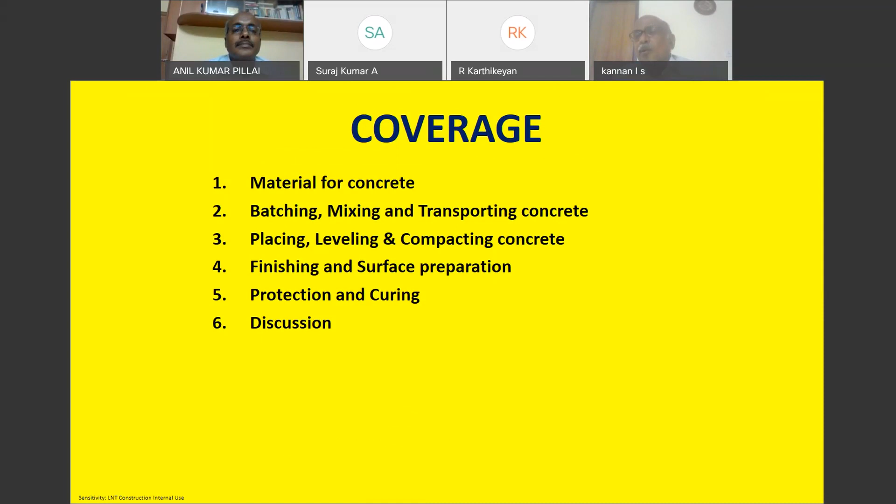So let me start the presentation. At the end, you can throw the questions through the chat, so that we can reply at the end. This is the flow I want to take: I'm not going to talk about materials here, or material properties - I'll be talking about handling of materials, batching, mixing, transportation, placing, leveling, compaction, finishing, protection and curing. Then we'll go for a discussion. I'll also talk about cracks when we discuss protection and curing. First of all, let me start this slide.

So there is no meaning for this word without you and I. Why do we need you and I to fulfill the word quality? Quality is nothing but teamwork. Without team, quality cannot be achieved.

The team means the owner, the specifiers that is consultants, the contractors, contracted engineers, supervisors, the ultimate workman. Everyone should know what they are supposed to deliver according to the project need. The owner has to specify what exactly he wants, which will be converted by the specifier consultants. The contractor has to adhere to the specification norms, what is given as per the contract. He has to fulfill the product requirement. Then only the required quality can be achieved.

Because when we talk about concrete, without quality, we cannot produce good quality concrete. Because whatever structures we talk about, the majority of the structures, the life of the structure all depends only on the concrete what we make. So unless the quality of concrete is good, the structure is not going to serve the purpose.

That is the reason even IS code, if you talk about clause 9.3, says as a guarantor of quality of concrete used in construction, the constructor is responsible for the quality. That means you can do the design mix by any method. They are not worried that you have to do only as per IS 10262. You do the mix design as per any method. If you don't have knowledge on design, refer to 10262 and do the design. But the quality parameters and durability parameters, what the concrete is supposed to fulfill as per the requirement of IS 456, the contractor or the executor has to execute. That is what is very clearly spelled out as per the code.

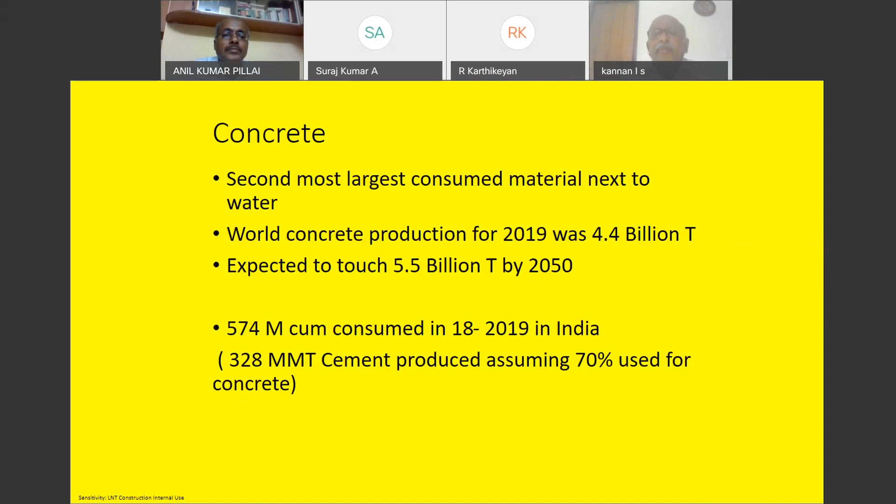And when you talk about mixes today, making a concrete mix is a real challenge. Earlier days, when you make concrete, the concrete was made only with a maximum grade of M40. I'm talking something around 20-25 years back. The highest grade concrete produced was 40 or 50, not more than that. And we had very little material available for making this concrete. Now today, we are flooded with a lot of materials like various types of rocks available, multiple types of sands available in making concrete. Alternative materials like fly ash, slag, silica fume, natural pozzolana, so many other materials are available. Chemical admixture industries have grown like anything.

So where we are able to make wonderful concretes with the help of chemical admixtures, the knowledge base on all these materials and subsets of materials is essential in making concrete today. Then only the producer of concrete or the concrete technologist, those involved in concrete making, can optimize and make concrete. For example, optimization means - in most cases whatever we are doing is design mix concrete. Even in any project site, if you take about 1 lakh cubic meter of concrete, even if there is a reduction of 1 kg of cement per cubic meter, you are able to save 1 lakh kg of cement through your optimum design mix.

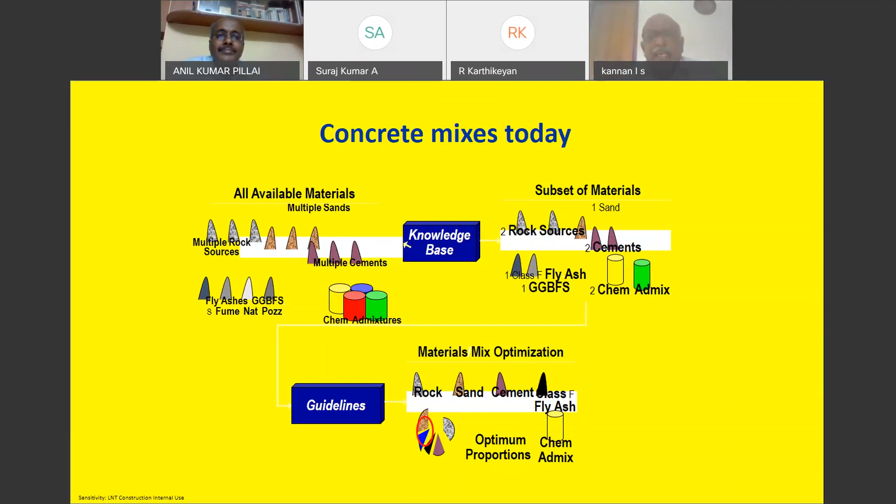As we all know, the materials for concrete are common: cement, mineral additives, fine aggregate, coarse aggregate, water, chemical admixtures, and others. Generally, when an owner or consultant visits the project, he says, 'you have done a beautiful concrete here,' or 'you have done a bad concrete.' What made them say that? It is not the quality of concrete, the water cement ratio, or the mix proportions. It is all about how the concrete is handled and placed at site that made them give these answers. They are able to comment only by seeing the surface finish of the concrete.

It all depends only on the workmanship, how the concrete is handled at site. Because production of concrete is only 15 to 20%. The remaining 80% is left to the hands of the field engineers. The concrete has to perform based on the execution parameters, which is what we are going to discuss more - how to handle and make concrete at site.

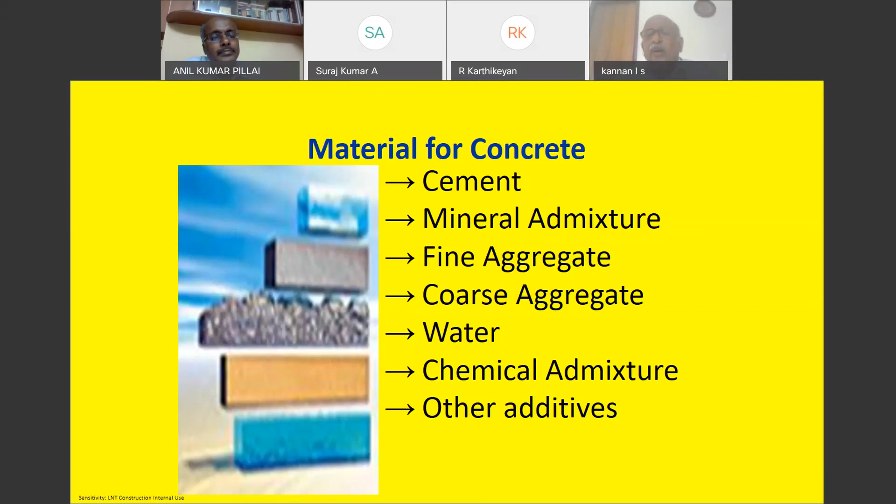Concrete can be made in 2 ways. One is at project sites, generally using a 10x7 mixer in small projects, or even for any residential building, we can go with a 10x7 mixer using nominal mixes - that is 1, 1.5, 3 or 1, 2, 4 and so on. The other thing is using a batching plant. The batching plant is categorized into 2 categories: one is a commercial plant where ready-mix concrete is made from a centralized place and supplied to project sites. The other is an on-site or off-site batching plant, made only for that particular project - for the project need, you can install a batching plant inside the project site, and the concrete can be produced and made there.

IS 456 stipulates M20 as the minimum grade of concrete for structural concrete. Even today, in some cases I come across, people say they have used M15 grade concrete for structure - we are not supposed to use that. After the revision of the code in 2000, IS made it very clear M20 is the minimum structural grade. In areas like coastal Chennai, depending on proximity to the seashore, the grade of concrete should be minimum M30 when closer to the sea, and when we go deeper inland it can be M25. So depending upon the exposure condition stipulated in the code, the concrete needs to be designed. It is not that only M20 or M10 is sufficient for my loading - depending on durability considerations, these are all parameters stipulated in the code that need to be followed.

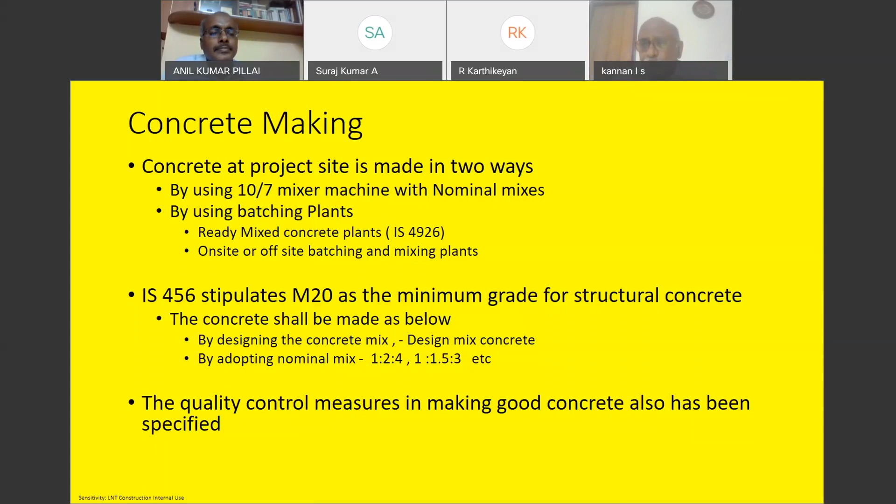When it comes to site mixer concrete, the concrete with a site mixer shall be made using design mix concrete converted into volume batching. You need not go for 1:3 or 1:4. So how do you do that? You do the design mix, and the design mix can be converted into volumetric batching as per the codal provisions.

IS also specifies, as per clause 10.2.4, volume batching may be allowed only when weigh batching is not practical, and accurate bulk densities of the materials actually used in the concrete have been established. That means when you are able to establish the bulk density of material, you can very well convert that volume into weight, and you can do it straight away.

What you can do is the design mix by weight. For instance, an example: if the density of coarse aggregate is 1500 kg per cubic meter, let me assume that. Suppose if you are using 300 kg of cement, that is 6 bags, and your 20 mm aggregate is 600 kg, as per the design mix, that means per bag will be 100 kg of aggregate.

So 100 kg of aggregate cannot be handled by 2 people, so you divide it into 50 kg in terms of boxes. Instead of making 1.25 CFT boxes, you make volumetric boxes equivalent to the volume of 50 kg of aggregate. So 50 kg divided by 1500 comes to 0.033 cubic meter.

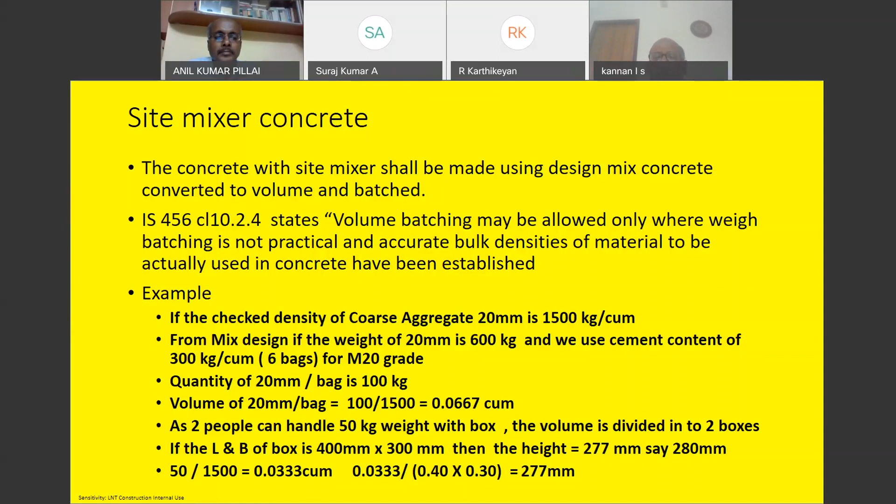So 0.033 cubic meter, and the box size can have length and breadth of 400 by 300, so the height should be 277. If you make a box like this for 50 kg, 300 by 400, the height is 277, and if you fill the aggregate up to the top, there should not be any overflowing. It should be made level — exactly this is going to weigh 50 kg of material.

In case of sand, check the bulkage and correct the volume for bulkage, and the height can be suitably adjusted. So instead of 277, maybe it may be 300 or 310, depending upon the density and bulkage volume. You reduce water accordingly, so that your design mix concrete, as it is, you can make in your 10/7 mixers. If it is as it is, well and good — you can produce a good quality concrete, and the structures will be more durable.

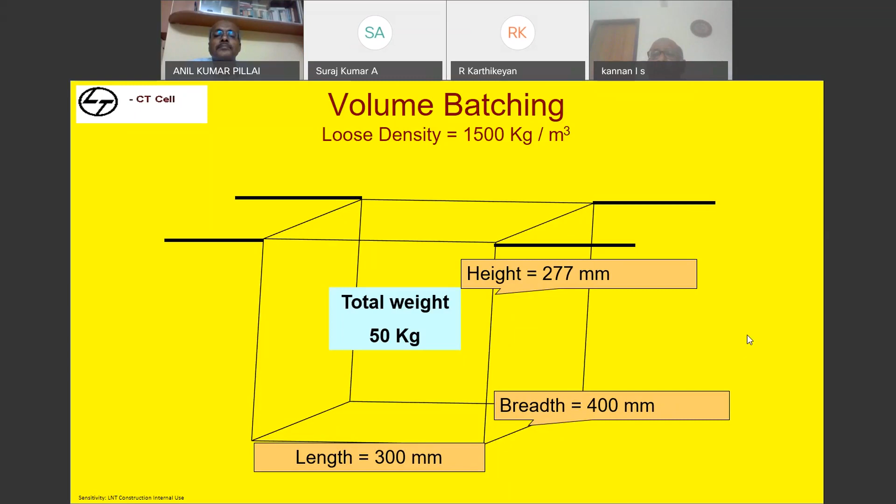When it comes to batching plant, as per IS 456, all concrete operations at project sites need to be done by batching and mixing plants only. In batching, cement and aggregate need to be weighed by mass. Admixture, if solid, by mass; if liquid, either by mass or volume. Water, either you can weigh by mass or by volume in calibrated tanks. This is what has been very clearly spelled out.

And what they say is the gradation of aggregate should be controlled by obtaining aggregates of different sizes and blending them in the right proportion when required. That means you don't go for a graded material, because when you go for a graded material, the gradation may not always be the same when you go with a design mix.

Whenever you are going for a design mix, what the code insists is you go with single size material of 20mm separate and 10mm separate, do gradation analysis, then blend 20mm and 10mm together depending upon the grain sizes available, to make it graded aggregate and use it for concrete making, so that your mix design and the quality of concrete can be controlled.

Only thing is, when you are making it, the separate material needs to be stocked in separate stockpiles, so that intermixing should not happen.

The gradation of coarse aggregate and fine aggregate should be checked as frequently as possible, so that the same material used in the mix design is used, or the material property is not varying much, so that the property of concrete is intact as per the design. The measurement of aggregate and material should be done in calibrated measures within the tolerances specified as per the codal provision.

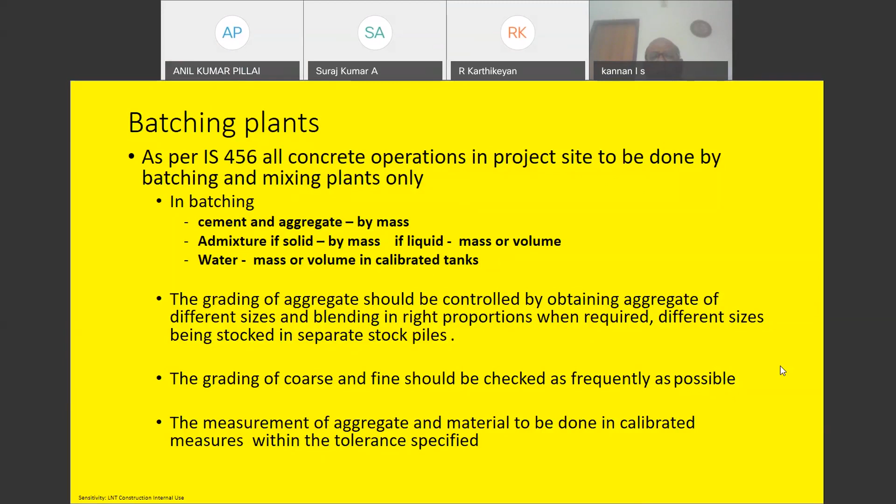There is a code called IS 4925. This is a code for batching and mixing plant. Even though IS 4926 or IS 456 is generally followed for calibration of tolerances, this is the code that needs to be followed for batching plant calibration, where recently the code has been modified and revised.

What they say is cement and other cementitious material, the tolerance is only plus minus 1%. Earlier this was 2%. Sand and aggregate plus minus 2%, earlier this was 3%. Water it is 1%. Admixture it is 3%. So the weighing machines used for weighment of aggregates in the batching plant need to have this tolerance.

One more thing they say is every batch of material being measured, whether it is a CP30 plant or any other, every batch that is measured - suppose if you are making only 0.5 cubic meter production in the CP30 plant, even for 0.5 cubic meter, the error should be within this tolerance.

Suppose you are going for cumulative batching of 6 cubic meter in a plant on a continuous batching system, they have given two options. When you are going for continuous production, the error can be taken on a continual basis. For 6 cubic meter transit mixer production, the overall batch sheet should satisfy within the error tolerances specified. The calibration of the batching plant needs to be done as below.

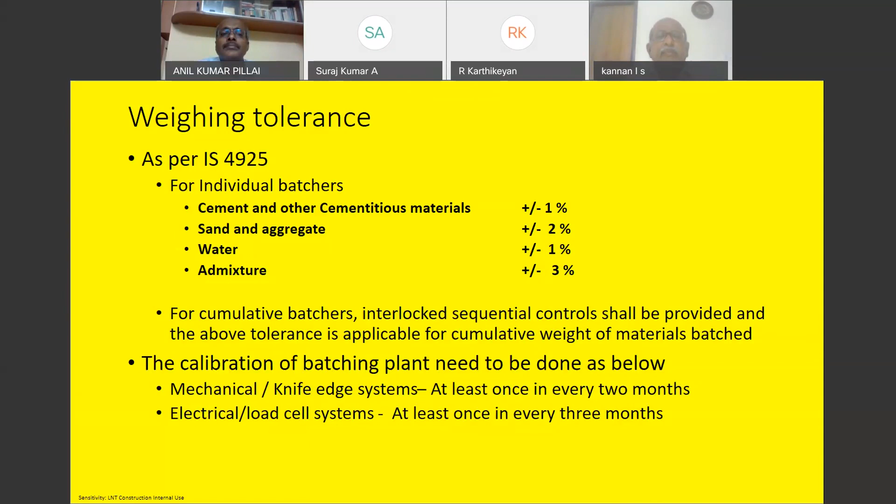There are 3 types of batching equipment available: rotary mixers, pan mixers, and twin shaft mixers. Earlier, larger rotary mixers were available and were being used, but now these rotary mixers are not used. Now mostly twin shaft mixers and pan mixers are used for concrete production.

Normally, the twin shaft mixer is used for producing concrete even with lower slump or higher slump. Generally, it is used for making PQC, pavement quality concrete, with 30 to 40 mm slump, which can be produced very effectively with twin shaft mixers.

When you go with pan mixers, which are the most commonly used batching plants across the industry, plant capacity is available between 30 cubic meter to 120 cubic meter per hour. The main thing is the efficiency of the concrete produced from a pan mixer batching plant depends only on the angle at which all these arms have been fixed.

This is because all these arms are controlled only by springs, and the gap between the mixing arm and the wear plate should be only 6 millimeters.

If the gap is more, automatically you will find a lot of accumulation of material at the bottom. When we receive concrete at site from the transit mixer and start delivering it, we find a lot of aggregates rolling out initially. This is because the gap in the batching plant is more, so only dry material gets fed to the truck, and unmixed aggregates roll out in the initial phase.

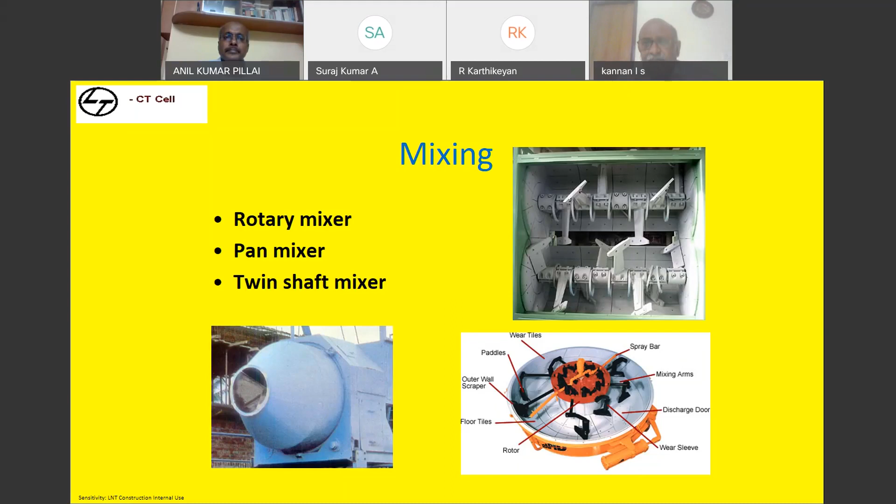When it comes to batching plants, these are all various types of plants. Nowadays, we are using a screw conveyor for delivering material to the plant, to the stocking bin. The same conveyor is used for adding 20 mm, 10 mm, crusher sand and so on. If the conveyor belt is not fully empty when you change and add material, unwanted material ends up going into the other bin.

This happened at one project site, maybe 10 to 12 years back, around the time conveyor belts were first introduced. Two batching plants went under operation. One batching plant was producing beautiful concrete of 150 mm slump. The other batching plant gave only 30 to 40 mm slump.

We started the concrete and went to site, asking why it hadn't come out right. They said, sir, I'm not getting slump. When I went up, I found sand had got mixed with the 10 mm aggregate. By mistake, sand had been dumped in the 10 mm bin from the last end belt. The sand content became more, which took away the water, so the concrete became stiff. So we emptied it, reloaded, and started again.

These are all practical issues that normally happen in the batching plant, but they need to be taken care of. Unless we have a thorough inspection mechanism with checkpoints, it's very difficult. Nowadays, we have made it so that unless the belt is fully empty, you cannot move it to the other system. We have made a digital system so the belt will be 100% empty before it can move to the next bin. You have to improvise your system to avoid these quality deficiencies.

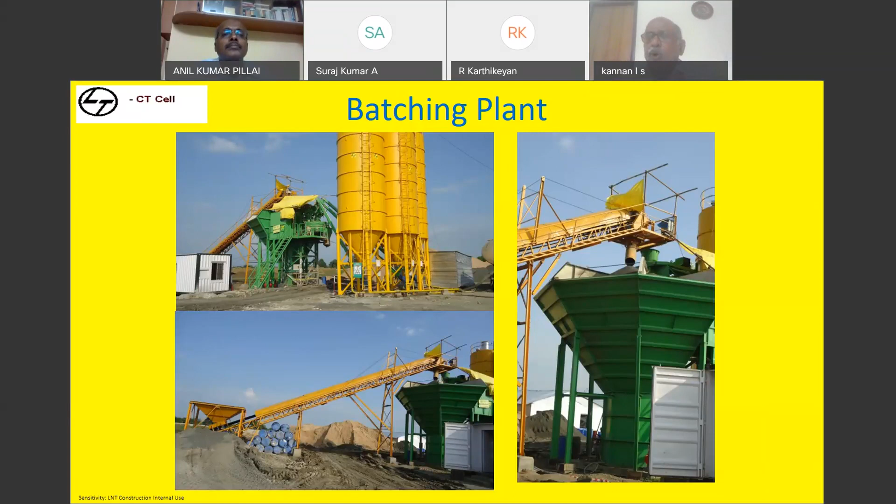The precaution we really need to take is to store all aggregates separately in separate stockpiles, preferably under shade. Why? In today's scenario, many concrete requirements come with temperature controlled concrete. If the aggregate is stored in an open area, it absorbs a lot of heat, so controlling temperature becomes very, very difficult. So always make it a practice to put a shed and store the aggregate.

When using a wheel loader, especially a front end loader, for feeding aggregate, ensure mud is not mixed in, because normally the wheel loader operator may not get friction, so what he tries to do is push. Suppose the aggregate stockpile is there at 1 meter, even before that he will start pushing everything, and he will pick up the mud also.

So ensure some amount of material is left, maybe around 1 or 2 feet, and the wheel loader is operated so that the right material is used and unwanted mud does not go into the system. Because mud is a foreign material, when it goes inside, your workability will drop. It's very difficult to control in a continuous operating system. If something goes wrong, it's very difficult to identify and correct, because time is lost, and the other thing is cost-wise it has a huge impact, so we need to take care of this.

When using conveyors for feeding, ensure they are fully emptied before loading, and identify cement silos and fly ash silos with color coding. Today we are using different cements and different mineral additives. Some project sites handle sulfate resistant cement and OPC, some handle OPC and PPC cement, and some handle OPC, PPC, fly ash and slag separately, depending upon usage.

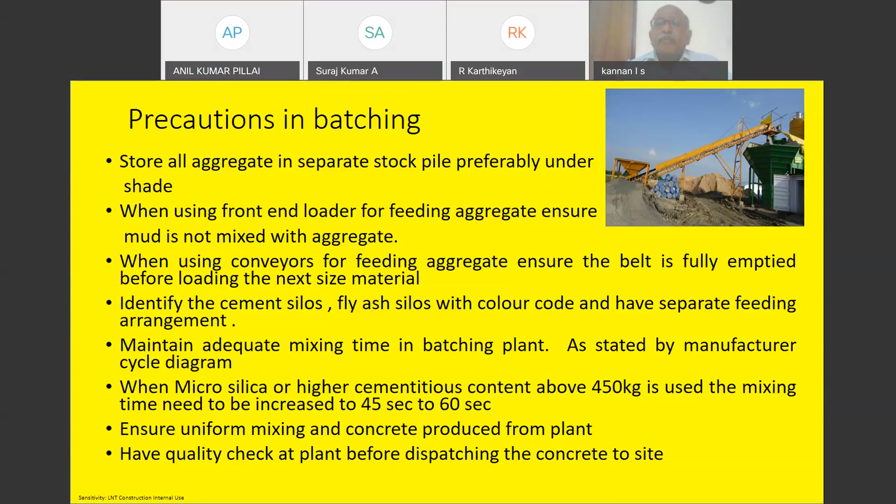Now, possible sources of contamination at the batching plant: allowing adjacent stockpiles. If you are dumping aggregate side by side - 20mm, 10mm, or sand - and there is no bifurcation available, there is a possibility of overlapping which can contaminate the aggregate. When this contaminated aggregate is fed again, your mix design parameters will change and your concrete quality will change. As I already discussed, scooping underlying layers of soil using the front-end loader is another issue.

Dumping the wrong size aggregate in a bin - 20mm material may look slightly undersized, but you should not dump it into a 12mm or 10mm aggregate bin. If you are getting a perfectly sized 20mm aggregate, it may mislead. Similarly, 10mm aggregate should not go into a 20mm bin. This usually happens only at night time, so we need to be very, very careful when dumping material at night.

Then there's aggregate leakage through and around bulkheads in storage bins. Wherever a storage bin is present, there should not be any mixing of aggregates - there should not be any hole, gap, or anything that allows mixing. One aggregate bin may be full while the other is half full, but aggregate should not flow from one bin to the other. That also you must ensure.

Leaves or other contaminants falling onto the aggregate stockpile - especially sand - is another issue, since people tend to stack material near trees, and leaves fall on it. This causes organic impurities and vegetation to start growing; you can find a lot of grass growing. That's a clear indication that organic impurity, plus silt and clay, is present, because sand alone, being a cohesionless material, cannot support growth - some cohesive media must be present for vegetation to grow. So as a user of the material, if you find such contamination, you must remove the vegetation and the contaminated material, and it should not be used for concrete unless it is washed and processed.

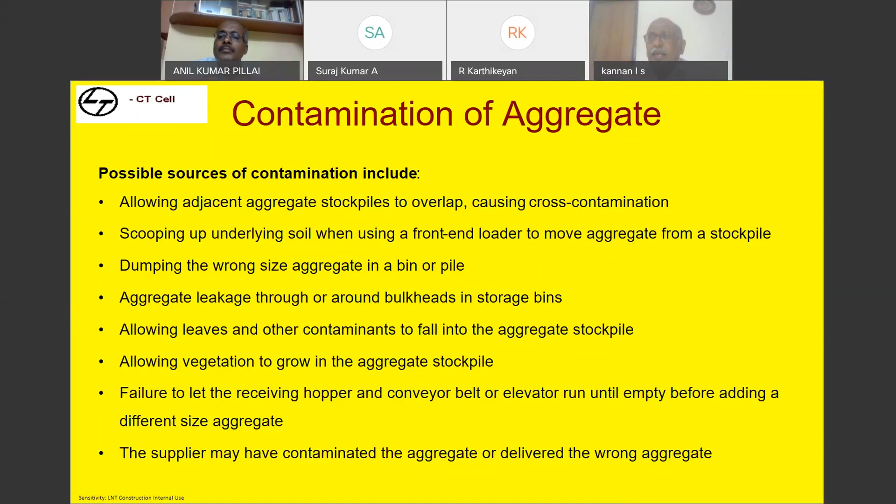What is the material that is reached site? Please check the material is in order. The quality of the material is in order. Then only allow to unload, so that by this you can maintain the quality.

Then we are coming to transportation of concrete. Transportation can be divided into two major categories: one is horizontal movement, the other is vertical movement.

Wheelbarrows can be used for transporting smaller concrete, especially in small project sites where you are working with the mixer machine. You use wheelbarrow instead of transporting concrete manually. Put a plank, run the wheelbarrow, and you can do it. So 2.5 cubic meter in a 70-meter lead you can do per hour.

Small tippers, dumpers like your front-end loaders, small loaders can be used for transporting concrete in small project sites. It can handle up to 100 mm concrete.

Tipper trucks can be suitable for stiff mixes, especially PQC and where we are transporting it. But ensure there should not be any contamination to the material, because normally whenever the trucks are free, the store will take them for purchasing some other material like diesel or something. So contamination should not happen, spillover or something should not happen, so that the concrete should not get contaminated. Ensure when you are engaging the tipper for concrete, it is fully clean without any

contaminated material. Vertical movement, you can use skips and buckets or crane, even tower crane can be used for concrete. Even the buckets which are used for transporting concrete can be fabricated for 0.5 cubic meter or 1 cubic meter capacity.

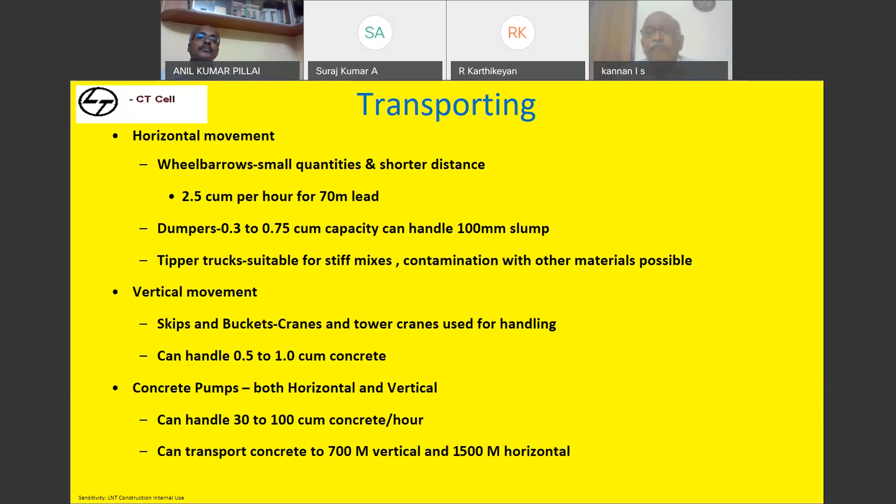We have done it. So these are all the transit trucks. Ensure whenever you are using a transit truck, always have the extended chute and dump the concrete, so that you are able to take it as close as possible. Especially whenever you are doing manual concrete, use this extended chute and dump the concrete. Don't dump it from the first chute, so that the concrete doesn't tend to segregate.

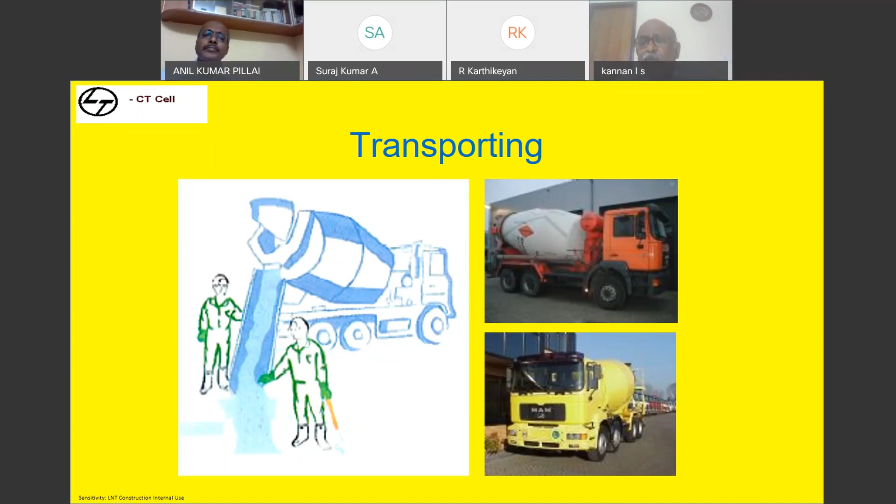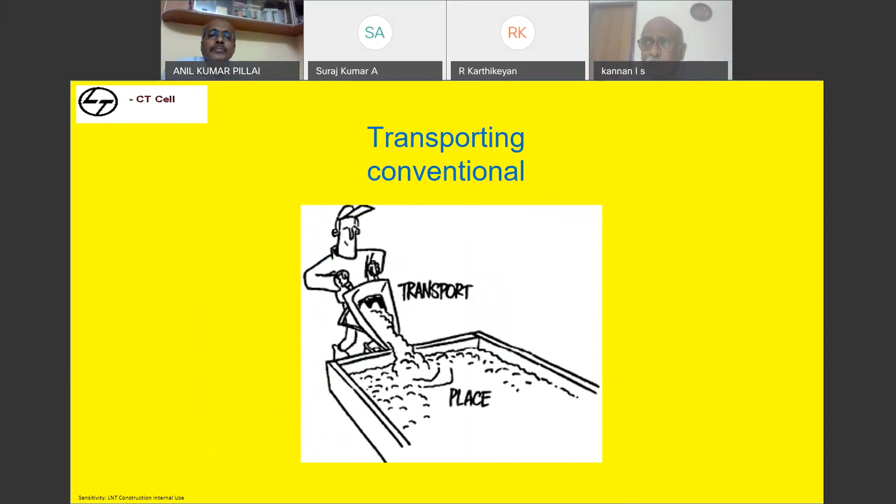These transit trucks have a capacity ranging from 3 cubic meter even to 12 cubic meter. We don't have 12 cubic meter plants in India. Some project sites are running with a 9 cubic meter plant, but the most commonly used is only 7 cubic meter, in which 6 cubic meter concrete is normally delivered. The conventional best thing is to use a wheelbarrow, where you get better productivity as well as you can minimize the variations in concrete.

So during transportation, slump loss during transportation need to be taken into account. Depending upon the distance to which you are transporting concrete, the concrete mix also needs to be designed. In hot weather, the mix can stiffen very fast, and you have to protect the concrete from hardening. Then in heavy rain, the mix becomes too wet.

Suppose if you are transporting it, even you have to close the top mouth of the transit trucks. Nowadays, even the trucks coming are coming with some lids to close. If old trucks are there, make an arrangement to close it. As far as possible, try to avoid batching concrete in heavy rains.

Mortar or slurry leak leads to workability loss. Normally what happens is if slurry is lost, the concrete becomes slightly segregated. You may not get the real workability or slump needed for the site. On a long haul, the mix can stiffen faster, especially in hot weather or for a long distance. So considering the distance to which the concrete needs to be transferred, you have to design the mix.

Contamination by oil, mud, and dirt should be avoided. Segregation can arise due to incorrect chute length or a long haul, placing on a platform, remixing, and reuse.

This is what needs to be done, especially when transporting concrete. Even project sites use a chute for transporting concrete to place in a foundation. A chute inclination should be 60 degrees to avoid segregation. Generally people keep it around 10 to 20 degrees while dumping from the transit mixer, so the concrete will not flow, and somebody ends up adding water to push the concrete.

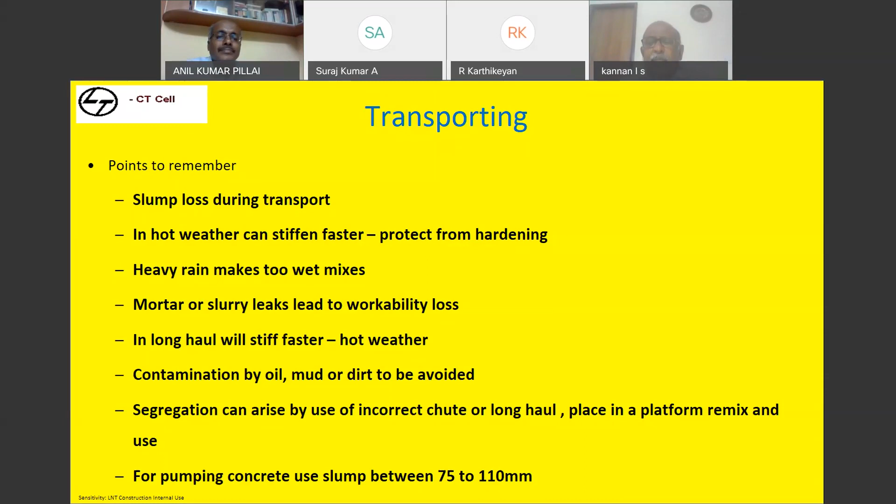You should not retamper the material. Have a proper chute with a proper slope so that the mixed concrete you receive from the truck, from the batching plant, goes inside the foundation without undergoing any corrections. For pumping concrete, normally 75 to 110 millimeters slump is essential.

Then it comes to site activity, which is placing. Placing concrete as close as possible to its final position, as quickly and efficiently as you can, to avoid segregation so it can be compacted. This is the objective. As per the code, the concrete shall be deposited as nearly as practicable in its final position to avoid rehandling. The concrete shall be placed and compacted before the initial setting time commences and should not be subsequently disturbed.

That means, suppose I'm making concrete and the initial setting time is 4 hours. I can handle the concrete up to 4 hours, provided the concrete mix design has the required slump needed to handle and place it within that time. It is not that I can retamper the concrete, add water, and extend it to 4 hours — my initial setting time is 4 hours, not that. If the workability is achieved, the code says to this extent we can make it.

Many of these specifications correlate with the ambient temperature. If the ambient temperature is 20 degrees or less, concrete can be placed up to 90 minutes. If it's more, within 45 or even 30 minutes the concrete needs to be placed, which is a highly impractical condition. The reason is, even when concrete is mixed at a batching plant and delivered to site, that itself takes around half an hour to 40 minutes.

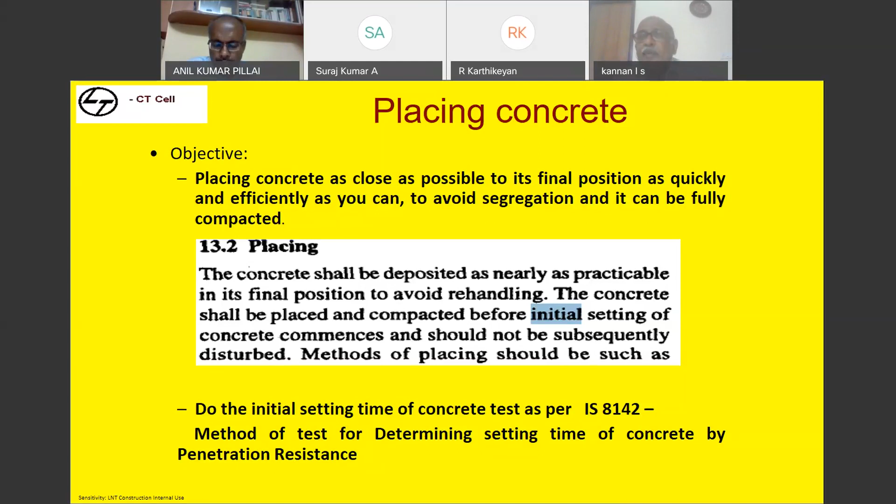Generally when I ask people, they say you need to place within the setting time of cement. But setting time of cement and setting time of concrete are totally different - let us not get confused between both.

The objective of placing is to place concrete as close as possible to its final position, as quickly as you can. Deposit concrete as near as possible, and place it in uniform layers, especially in columns and walls, at 450 mm.

Why we said 450 mm is because nowadays we are going with heights of 3.6, even 4 or 4.2 meters, soffit to soffit of slab, with single lift columns. And majority of columns are pumped. When pumping the column, within 4 or 5 strokes the entire column gets filled up. When you de-shutter, you find some waviness at the bottom - that waviness is nothing but segregation that has happened to the concrete as it is pumped, passing through the reinforcement.

Because today, considering seismic design and the congestion of steel reinforcement, placing concrete especially in columns is very, very difficult.

What we need to do is mark either 450 or 500 millimeters first in the column. Place only that much concrete needed and compact it well first, then pump further - you are placing concrete over concrete, so no segregation happens and you'll be able to vibrate it well. Make it a practice: only 450 mm is poured and compacted well, because that bottom zone is the shear zone, which needs excellent compaction. Let us not make the section weaker - don't pour more than 450 mm in the initial phase. After that, if you fill and vibrate, nothing happens, because you eliminate the segregation at the bottom.

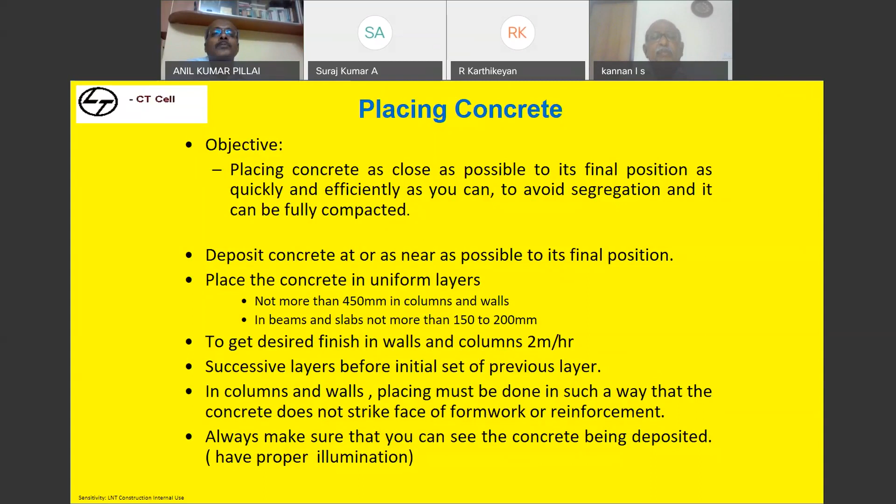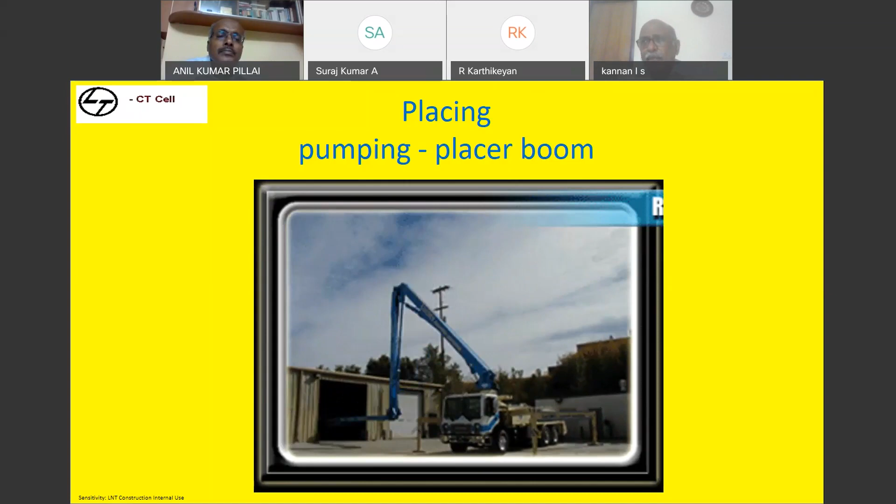This is the static pump. Everyone knows this is a boom placer. Boom placers are available in 36 meters, even 52 meter boom placers are available, but in India the 52 meter is not there. The purpose of the boom placer is that it can travel anywhere, even to the sides of structures, and be placed. Whereas a static pump needs a fixed line, in the case of a boom placer that is not needed.

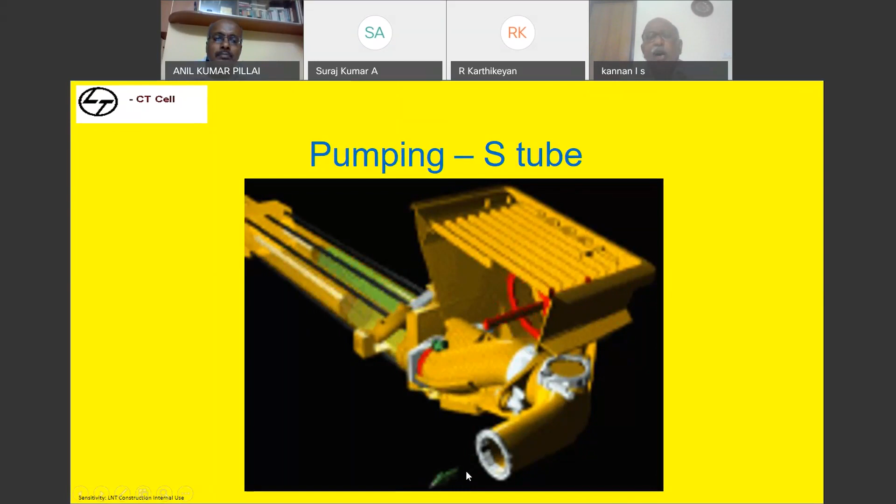When concrete is poured, the pump works with two pistons in a reciprocating action - when one piston sucks, the other pushes out. In a static pump, it goes horizontally out; in a boom placer, it goes vertically up. That's all, the system is the same.

Then from here, it falls in free fall, normally around 15 to 18 meters length. So what you have to do is try to bring the hose as low as possible, and bend the hose at the bottom. The hose can be bent to 90 degrees, or you can use a bend that can be reversed. When you reverse the bend, the free fall concrete will get accumulated there, and when pumping, a uniform concrete will get pumped out.

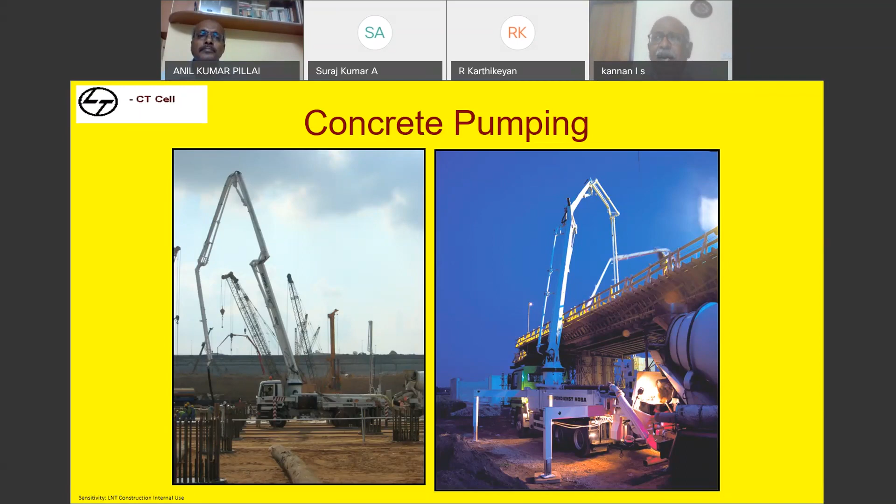So now this is a straight 90 bend. If you reverse that straight 90 bend, you can get good quality concrete, so that the concrete falls only with the 6 meter length pipeline and nothing happens. You get a full hose length of concrete, because normally the full pipeline concrete doesn't come through—generally it falls like half water flow, that's how concrete flows with the boom placer. When you do that reversal, you get good concrete, like how concrete comes with a static pump, and segregation can also be avoided.

When we talk about free fall height, federal highways permit 46 meter free fall, that is 150 feet free fall. They say the concrete mix we design should be such that when it falls from that height, it should not show any segregation, or the properties of the concrete should not differ. When it comes to Indian standard, it says it may be restricted to 1.5 meters.

Even though a lot of changes have happened in the code, many concrete and design parameters have changed, this parameter of restricting to 1.5 meter has not changed in the code. What has happened is, even if you're talking about 1.5 meter, completing the project site within that limit is very difficult—we don't have sufficient time to complete the job.

Secondary thing is, if it's restricted, people will say you should insert a trimming pipe. But with the way reinforcement design is happening considering seismic requirements, it's very difficult to insert anything inside. In some project sites, we've even observed that without formwork, if we stand on opposite sides, we are not able to see each other—to that extent, the density of reinforcement is there.

So in such cases, suppose you are going with a high lift column and the reinforcement is dense, don't go with normal slumpable concrete of 100mm or 120mm. Go with self-compacting concrete or high flow concrete, where you can design a mix like piling concrete of around 200 or 220mm slump, where your flow will be around 400 to 450 millimeters.

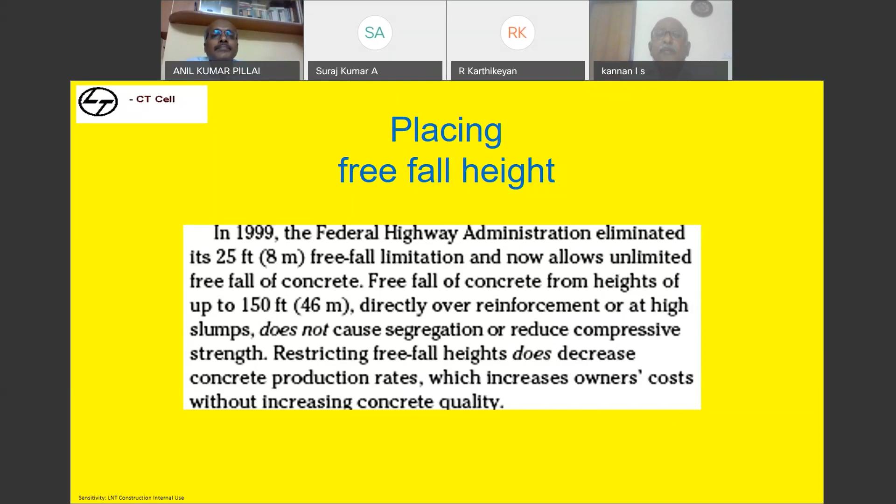When the concrete is placed by pump, the mix designed should satisfy the requirement of the pump manufacturer's specification. Normal slump of 75 to 110 millimeter is ideal. Cement content or cementitious content should not be less than 280 kg per cubic meter—that is the minimum mandate for smooth pumping.

People can say, I can pump a PCC even with 220. You can pump it, but many times the pumping will get choked. If you have a cementitious content of around 280 with sufficient sand content, the pumping may become easier.

Combined aggregate grading needs to be used, with slightly increased sand content, maybe 40 to 45% of total aggregate if needed. Depending upon the fineness modulus, you need to decide and add accordingly.

If you are able to make a concrete of such kind, your mix will be perfect. So to achieve that, if you have around 40 to 45% of sand in your mix, definitely your concrete will be highly workable. Then material finer than 300 microns in sand should be at least 15%, and including cement and sand passing, the overall weight should be 450 kg per cubic meter for a 20 mm aggregate.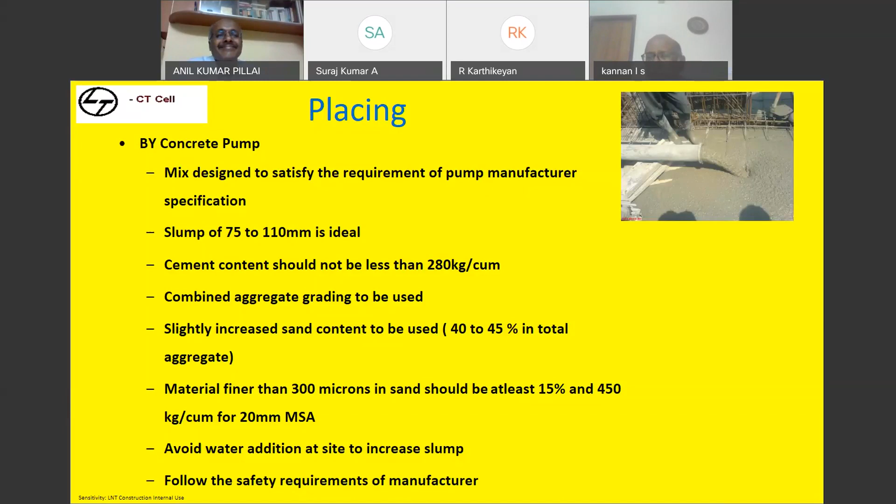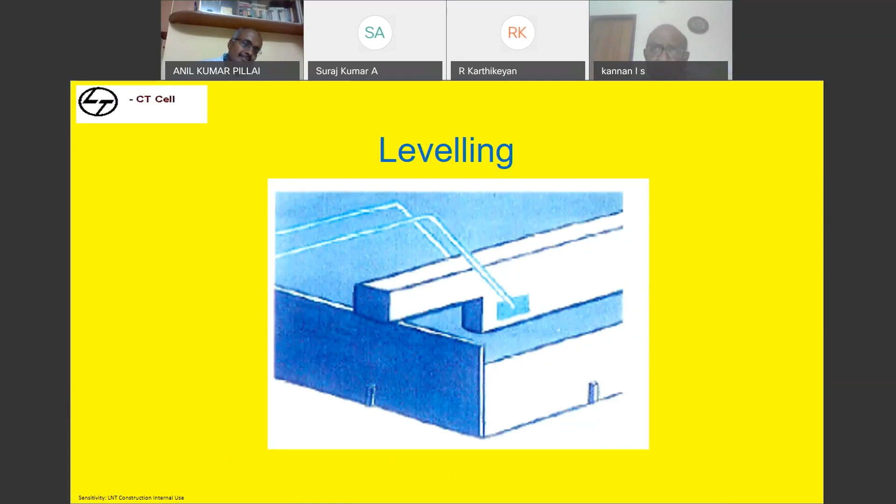The next thing is leveling. Why do we need to level concrete? We need to stop the structures at various levels, at various floor levels and all. That is one. Suppose if you're doing flooring, you have to stop at a certain level. There are various methods available for leveling of concrete. There is no hard and fast rule on what we have to do. Depending upon the project size, things can happen differently.

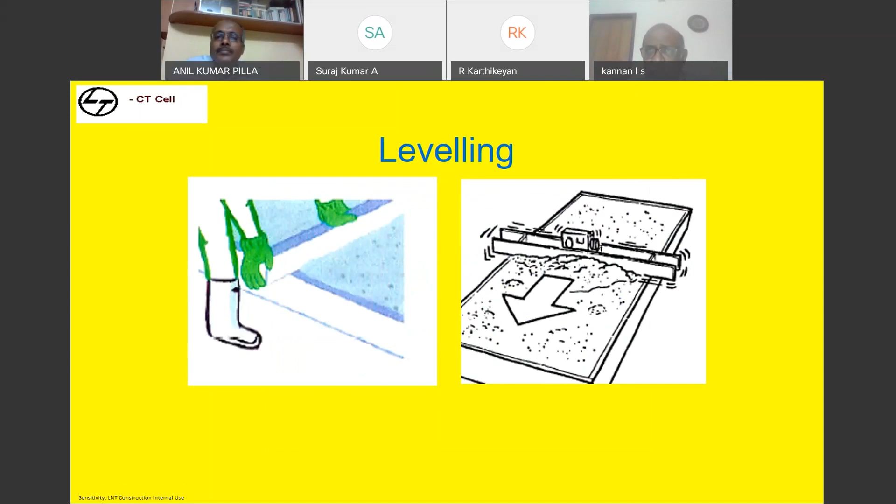Generally, people will be using a straight edge for making a normal level. Or they'll be giving a wooden peg. Suppose if you're doing a slab, they'll have a wooden peg, and they will keep on continuously measuring whether the thickness is okay. Normally survey lines will be given, and from survey lines, the level will be checked. Like that, all you can make it.

Nowadays, laser screed is also available, where undulations in concrete can be minimized. That is possible where your slump of concrete needs to be around 140 to 150 millimeter, where you need to place something around 40 cubic meter per hour. That's the requirement of concrete needed for the leveler and screeder. Only then will it be very effective to place and compact the concrete well.

So here, through the laser, you can give a level where the machine can do a compaction of 2 to 3 millimeter variations within the allowable tolerance. Normally the level difference we are observing is maybe in meters length, and the difference may be 3 millimeter.

So that can happen. In other project sites, you can even use a bull float for making concrete finish, because normally in Indian conditions we are not using bull float at all. Bull float can be used for making the concrete finish so that the finish happens in an excellent way, and leveling can happen. A straight edge also can be used for making leveling - it's not that you should not use it.

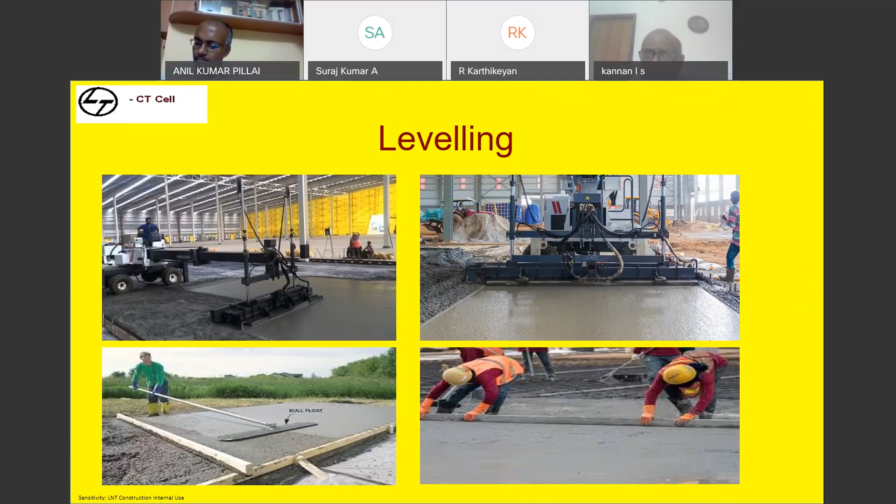So depending upon the volume, we can decide what type of equipment is needed. Only for larger scale work, or for industrial flooring and all, if you are thinking of that, then laser screed is the best, where we can do the job with more stringent quality norms and be able to deliver.

When it comes to compaction, why do we need to compact concrete? Compaction of concrete is more essential to remove the air entrapped in concrete. And is there any correlation to slump? Yes - higher the slump of concrete, you have to compact it less; lower the slump of concrete, you have to compact it more. The reason is when you are compacting it, the concrete is going to move. So if it's fluid concrete, you should not compact more, it will segregate. Lesser slump concrete, if you are not compacting well, it may not flow. So depending upon the slump, the compaction time also needs to be verified.

What will happen in case I am not compacting well, and how much reduction in strength? Definitely voids are going to be there inside concrete if compaction is not going to happen, and 1% void in concrete is going to reduce strength by 5%.

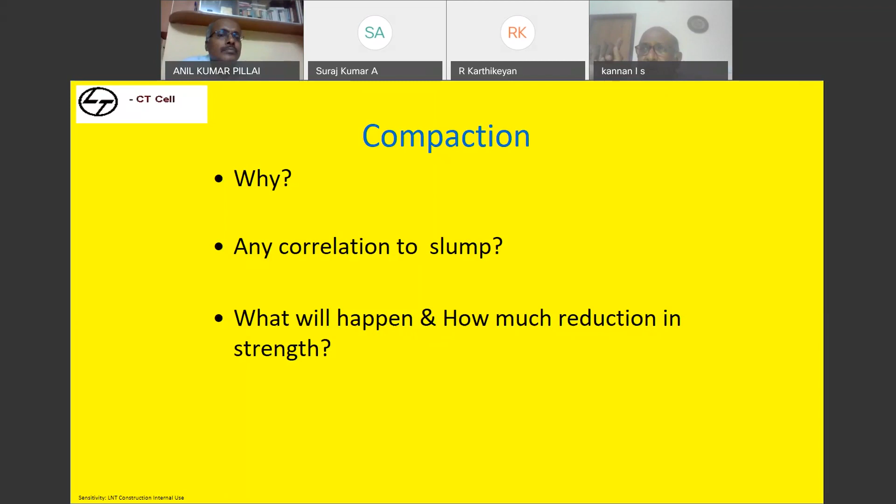1% of void left will reduce the strength of concrete by 5%. Please remember this. Now, let us see how to compact.

See, you are able to see 3 different layers. This is old concrete, old meaning not too old. This is the third layer, second layer, first layer - the freshly laid layer. The vibrator needle has to percolate to the previously laid concrete so that the stitching of this layer and that layer happens. If stitching has happened, we will not be able to see the layer lines on the sides. In how many layers you have poured the concrete, we are not able to see, because the stitching generally happens.

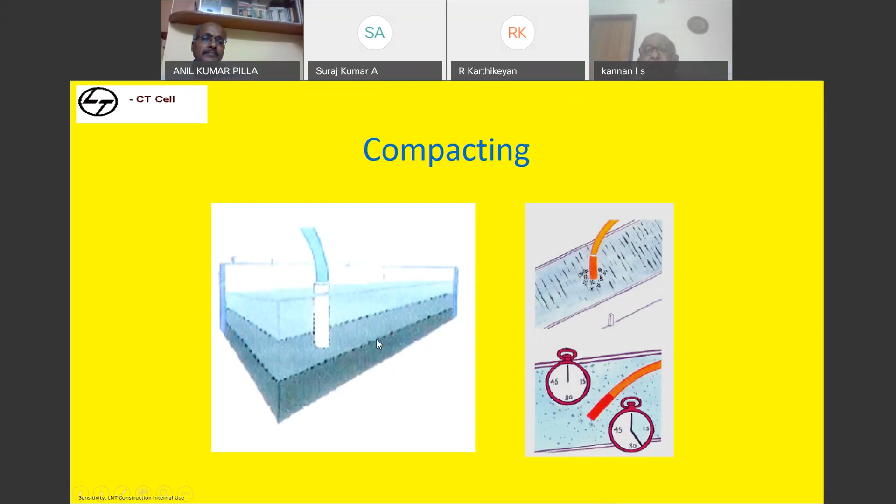So the vibrator needle has to percolate on its own weight without any pressure to the bottom of the layer, at least 250 mm, and the stitching should happen. This is the process of compaction with the needle, and it has got time limitations.

There are 3 types of needles available: one is mold vibrator, the other is poker needle, and the third is screed vibrator. Mold vibrators are generally used for precast applications, and the commonly used one is poker needle. Screed vibrators we use for pavements, or where we have a larger area of slab. The same mold vibrator can be mounted on a channel, and the channel can be pushed for compaction. The process is: as you shake and vibrate the concrete, the air is pushed out.

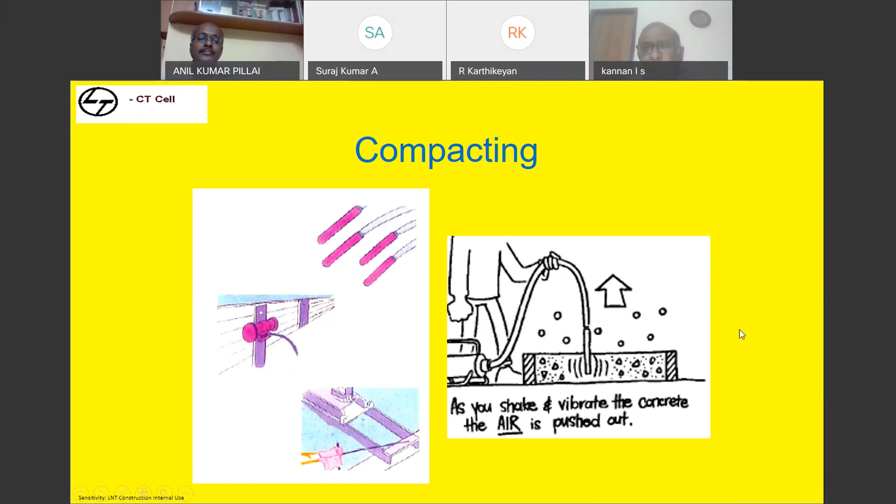This is the process. Now let us see staging.

When you insert the needle, liquefaction of concrete happens, which allows the concrete to slump and fill the form. That means when I am inserting the needle, the concrete becomes liquid and goes and fills the form, and the concrete forms its shape. For that, it needs hardly 3 to 5 seconds.

I continue my compaction by keeping on vibrating it - I push the needle up and down. When I am pushing up and down, the air bubbles will start coming out. When the air bubbles start coming out, you will see the concrete start revolving surrounding the vibrator needle. When you see that, compaction at that location is over and you have to slowly withdraw.

That needs hardly 7 to 15 seconds. As a whole, if I'm inserting a vibrator needle in a position, hardly 10 to 20 seconds is the time needed for compaction. This 10 to 20 seconds depends upon the type of slump. As I said, depending upon the workability, the compaction time needs to be checked.

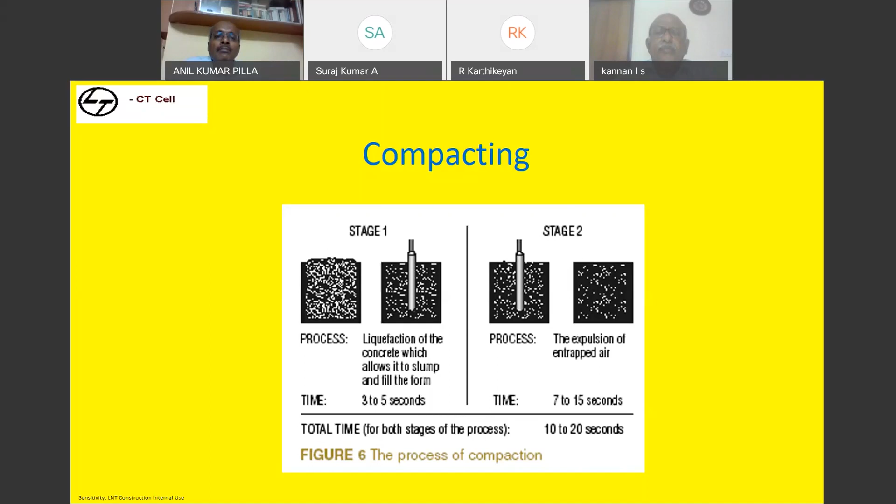So for which, we need to overlap. Generally we use a 40 mm needle or 60 mm needle for compaction, and nowadays most of the concrete we are making is more than 75 mm slump. In case it's a 40 mm needle and the slump is more than 75, it can compact 250 to 350 millimeter area - that's the only area it can compact. If it's a 60 mm needle, it can compact 400 to 500 millimeter area.

That means other than that 500 mm area, even though I am able to stand here, I'll get the feeling the concrete is not getting compacted. Let us be very clear about the process: every 1 feet, suppose if you are using a 60 mm needle, every 1 feet you have to insert a needle so that you are overlapping and compacting.

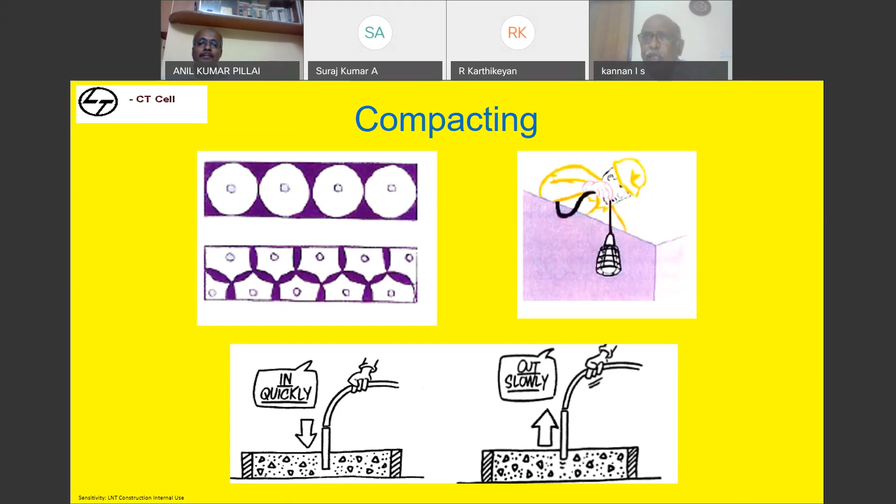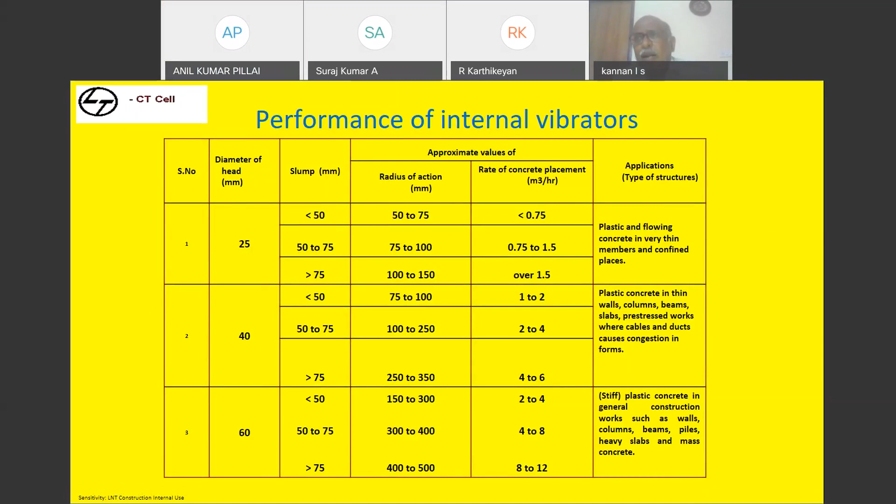Never touch the form face with the poker. One more thing, suppose if you are using a 40mm needle, you can compact only 4 to 6 cubic meter concrete per hour. In case you are using 75mm slump concrete with a 60mm needle, you can compact only 8 to 12 cubic meter concrete. So this is what is possible with a single needle.

Never touch the form face with a poker. Normally bulging will happen. And never touch the reinforcement with the poker. You can get a beautiful vibration because it will get transferred everywhere through the steel, since steel is interconnected. But what happens is the steel also will get displaced, and your needle will get cut.

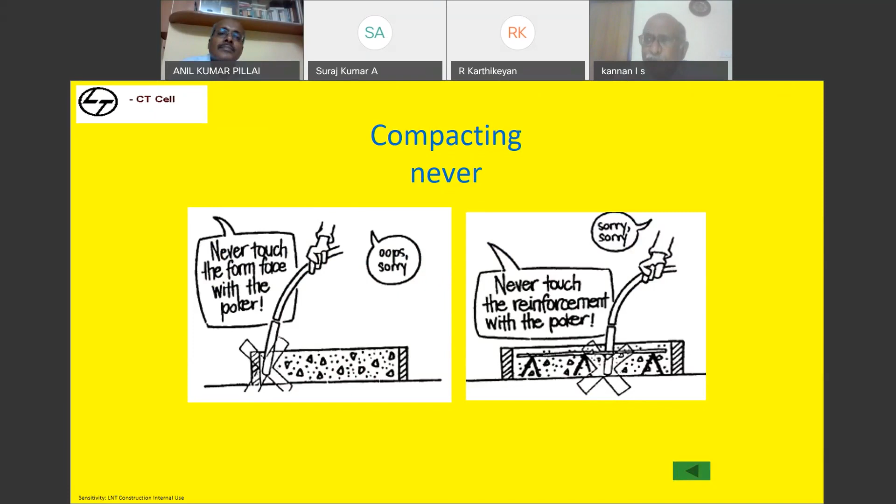Don't do this. When it comes to finishing and surface preparation, do the first finish after compaction. The mason will do the finishing with the float or straight edge and all. After some time, you will find bleed water coming on the surface.

Concrete has to bleed. Don't think concrete should not bleed. Some amount of bleeding should happen, but water should not flow like a river. During that process of bleeding, you will find some cracks.

I'll tell you how to handle that. You have to send the mason back after 3 to 4 hours with a wooden float and tamp the entire surface. It's not only the cracked surface, the entire surface you have to tamp with the wooden float, finishing it in a circular manner so that the concrete surface becomes rough.

If any other finishing needs to be done like a power trowel finish, you can do it. Suppose your slab has a secondary finish of flooring, it's better to go for a broom finish. Don't insist on a trowel finish because it will induce a lot of cracks. The smoother the surface, the more the cracking tendency.

Unless it is warranted, don't insist every slab needs to be finished with a power trowel. If you have floor finishes planned, it's fine either way; if you have floor finish coming, better to go for a broom finish to make the surface rough so that you are avoiding the concrete from cracking. That is one.

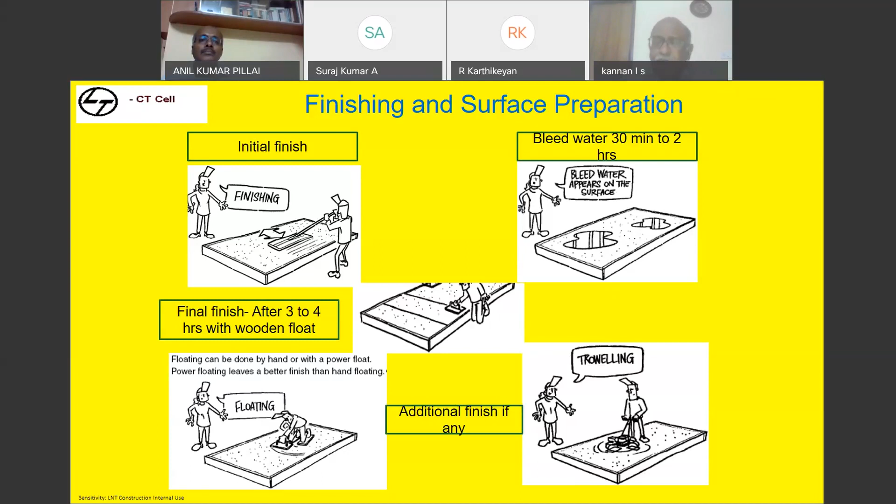And never allow anybody to walk on the concrete. We are not Neil Armstrong to put our foot on the concrete like how he made footprints on the moon. No one should walk on the concrete because it looks very ugly.

And never load the structure. You should not do the concrete today and dump material on top tomorrow morning while the concrete is still green. At least allow it to harden for 24 hours. I am not asking you to stop the work; do what is needed for the activity only, take the material and do the job, but never load the structure unwantedly, because the concrete is still green and it may crack with the extra load given.

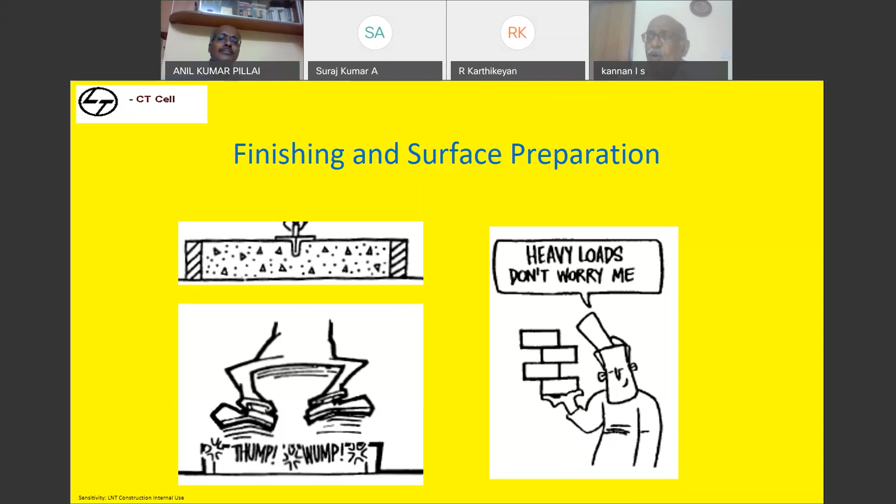Before any subsequent activity happens, discuss with the designer where you can distribute the load. Without the concurrence of the designer, don't load. Please check, then you can do the subsequent activity.

And dry shake, never do it unless it is warranted for a floor finish where floor hardener needs to be done. Generally for floor hardener, after compaction we will sprinkle it; we will not even do the finishing, we will just sprinkle.

Suppose I am doing a power trowel finish and the concrete is slightly hardened, so my power float will not move. What do people do? They put some cement slurry and sprinkle it on top. Or if they find some cracks, they immediately mix cement slurry and put it over. Or they spray cement on top because the concrete is bleeding, to absorb the water. These things should not be done. Whatever we add on top, nothing is going to go within the concrete. On drying, everything is going to peel and come off.

Concrete is a material - when you are mixing it in the batching plant, whatever you are adding, you can add. After that, whatever you add outside will not go inside the concrete, it will show its face. It will all come as a secondary finish, whatever you are adding.

Many people talk about their floor dusting. If you really go in detail, what has happened is they would have made some mistake in finishing - they would have added cement slurry, or sprinkled excess water for finishing. These things result in such defects. So don't do anything. There should not be any material sprinkled on the surface of the concrete.

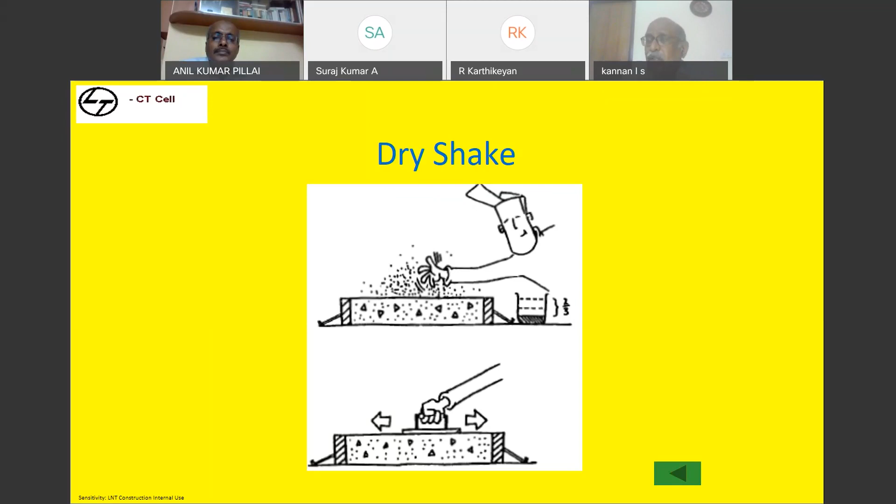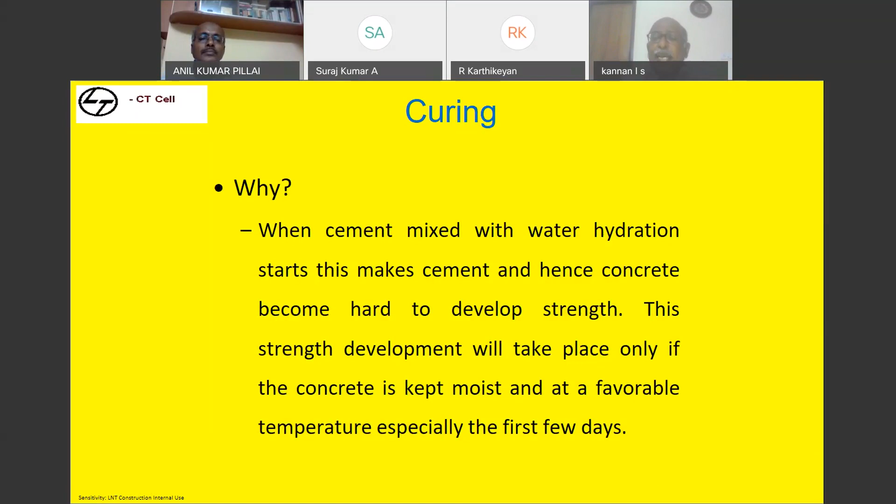When it comes to protection and curing, which is very essential, the purpose is: when cement mixes with water, hydration starts. This makes cement and hence concrete becomes hard and develops strength. This strength development will take place only if the concrete is kept moist at a favorable temperature, especially the first few days.

So you can decide upon various methods of curing. Either you go for ponding, or sprinkling or spraying, or use damp sand, or damp hessian cloth, or even a polythene plastic sheet to cover the finished concrete. These are all things that help protect the internal moisture from evaporation.

The purpose of curing is providing a media to prevent evaporation, keeping the water inside the concrete as it is. Concrete is not going to absorb any water. People will say concrete is dry when you are not curing it - why it is dry is that internal water comes to the surface and it starts cracking. These things can be avoided by providing a media against cracking.

It's not necessary that you have to flood. You have to keep the area moist. If you are able to keep the area moist, then the cracking tendency can be minimized. Normally, after finishing, if possible, cover it totally with a plastic sheet or put a hessian cloth and sprinkle water.

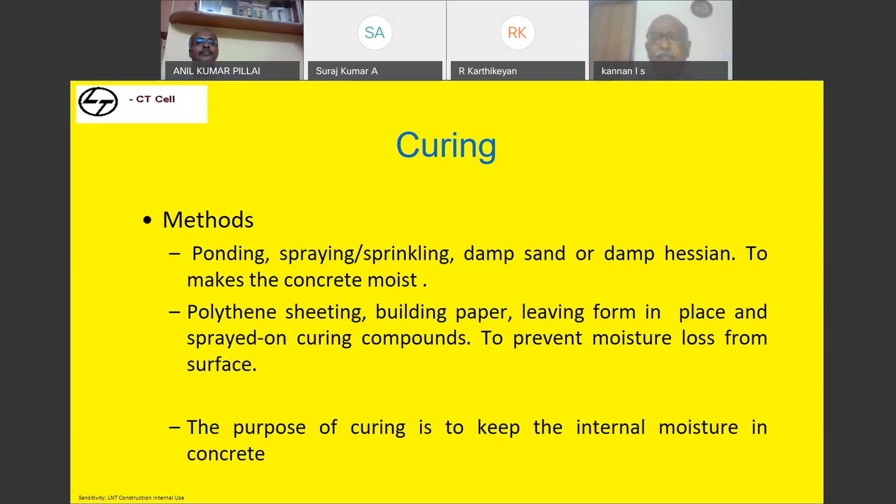Generally, an uncured surface of concrete, if curing is not done at all, gives only 45 to 50% strength. If I cure the concrete for 3 days, it gives 60 to 80% strength. If I cure it for 7 days, it gives 90 to 100% strength. If I cure it for 28 days, it gives 135%.

Again, curing means keeping the area moist. If you are able to keep the surface moist so that the internal water will not evaporate, that's all. You should not flood - normally what happens is people make a bund and flood it with water, so subsequent activity should happen. People will break the bund, the water will flow, and the concrete slab surface will become dry.

It doesn't matter - put somebody to sprinkle water always. Don't allow the surface to become dry. See that the surface is always wet. On a wet surface people can work, but when water is standing, nobody is likely to work.

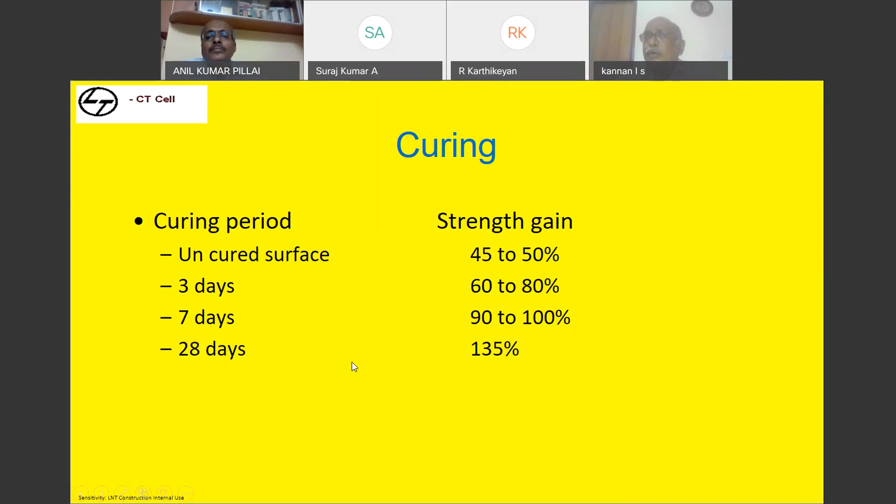So keep the surface moist, or put some hessian cloth and continuously pour water, cover the surface, or place a plastic sheet. Even if evaporation happens, the water will get condensed and fall back inside - no water will go out. These are all precautions we can take to help curing of the structure. Anything can be used, there is no hard and fast rule that this is what you have to follow. Whether you use curing compound or water depends upon the shape.

When it comes to curing compound, there are two different types available: one is acrylic based, the other one is wax based.

Depending upon your secondary finish, if you have any subsequent finish available, like painting, tiling, or wall finishing, go with only acrylic based curing compound. Don't go with wax based, because once wax based is done, you will not be able to remove the wax based curing compound from the surface. Nothing will adhere, it's very difficult. Probably you have to grind and remove the surface. So instead of that, go for an acrylic based curing compound.

Preferably, most curing compounds come only colorless. Only to identify whether you have applied it or not, pigments are getting added. Tell the manufacturer to add a light white pigment. It should not be too thick, because it becomes like a whitewash and will be visible. It takes some months for the white color to fade.

Generally, people ask, if I've added a water-based curing compound, do I need to scrap the surface to continue the activity? Nothing. When you're going with an acrylic base, you can continue, because bonding can happen. Only wax is having an issue.

Depending upon the surface, the element, and the shape of the element, you just decide what type of curing is best for the structure. Ensure that internal water is kept in the structures. That's all.

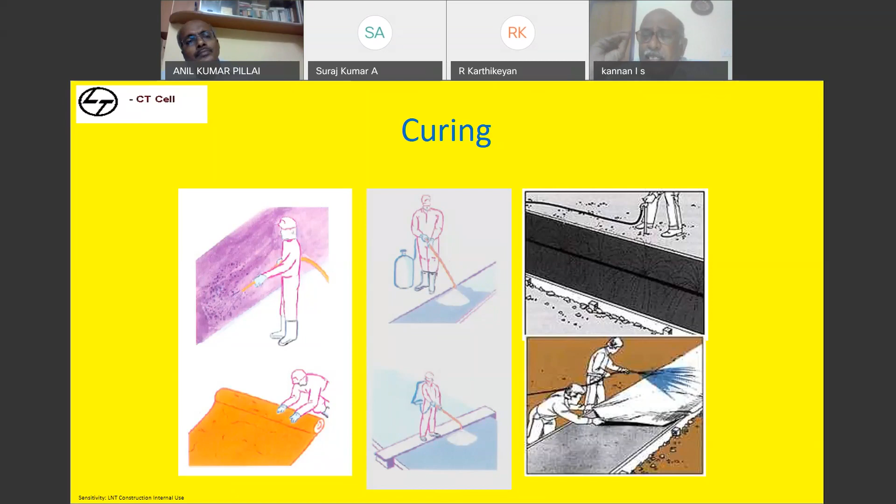Common cracks. Generally when we pour concrete at site, cracks can happen. Crack is an unavoidable phenomena in concrete, because it's a natural material. Concrete will crack, we cannot say concrete will not crack. What we used to say in the initial phases is you allow the concrete to crack, because normally when the concrete is in the green state, shrinkage cracks generally come. The pattern is normally haphazard cracks, haphazard parallel cracks, or even interconnected cracks, but it is all haphazard in nature.

Shrinkage cracks normally happen due to moisture movement from the surface. That is the reason we tell you please cure the surface and keep it moist. When the concrete loses water from the surface, drying and wetting can happen, which will lead to cracking of the surface, the surface will shrink and crack.

Ambient temperature more than 20 degrees and wind velocity more than 5 miles per hour, that is 8 kilometers, means it's a very common phenomena. The wind blowing at 8 kilometers.

And one more thing I'd like to say - people think, sir, I have done concrete in the daytime, nighttime it doesn't require any attention because there is no sunlight. Nothing - nighttime you have wind. Worse shrinkage crack happens at night than in daytime, because wind carries a lot of water, excess water goes at nighttime. So we need to prevent the concrete, whether it is daytime or nighttime, from shrinkage. Please keep this in mind. Don't carry the thinking that whatever I have done in the morning, nothing will happen, day or night. Concrete doesn't know day or night. Concrete is concrete, it will show its face if it is not handled properly.

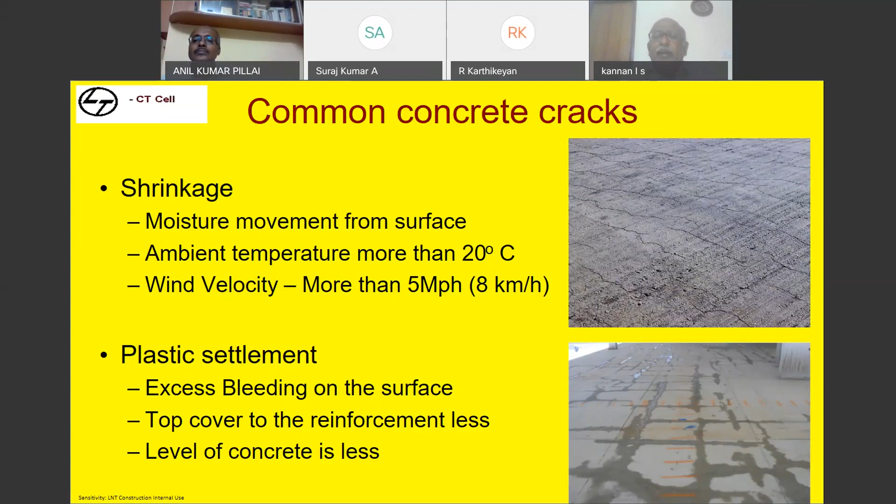So these are some photographs of plastic shrinkage cracks. Now, as I said, the finishing activity is the same. Do the initial finish, let the bleed water evaporate. Now the mason has to go only with the wooden float - this is the wooden float. Don't use any steel material. If you use steel material, the surface will become smoother, and the smoother the surface, the cracking tendency will be much more. You have to make it rougher. By using this wooden float, the wooden grains form thin grains on the surface of the concrete, so the surface is rough and doesn't crack.

Ask the mason to tap the entire surface of the slab with the wooden float in a circular manner to finish it. If any secondary finish is needed with additional finishing, do it.

Start curing after 5 to 6 hours. It is not that only after 24 hours or 12 hours concrete needs to be cured. When the concrete attains a touch hard state, that means it has attained its initial setting time, you can start.

You need not pressurize the water. Just put the hose in case of a slab. Make a bund, put the water, just hose it and allow the water to float. That's all, let it be there inside, so that you ensure no water escapes from the initial phase itself.

By this, you are allowing the concrete to crack, whatever cracks happen at this state. By doing a secondary finish tapping, you are closing the crack, because whatever crack has formed is hardly 0.5 millimeter in width and maybe 2 to 3 millimeter deep. So when you tap the surface, the slurry that gets accumulated will close the crack, and the concrete will not crack further.

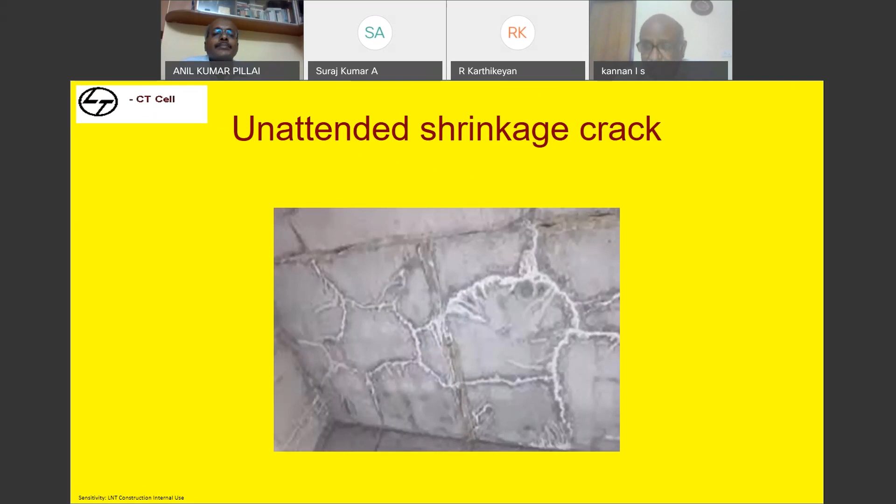In some cases it gets closed, sometimes even the slab can leak. This is a bad sign, even though structurally nothing is wrong with it, but from an acceptability point of view, everybody will get panicked by seeing such cracks.

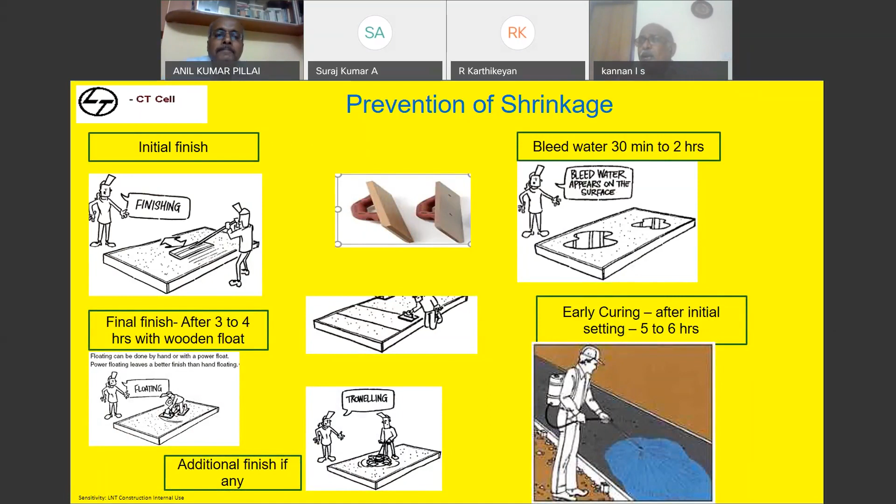So to avoid this, as I said, secondary finish is a must. For delayed finish, send the mason back after 3 to 4 hours, damp the entire surface, finish it off in a circular manner with the wooden float, and start early curing after 5 to 6 hours of the concrete to prevent shrinkage across the entire surface.

Plastic settlement: you can see concrete bleeds, the bleed water comes out. When the bleed water comes out, the concrete wants to settle. Since reinforcement bars are rigid members which don't allow the concrete to settle, the concrete still settles, leaving a line on top of the bar, meaning you can see layer lines where the reinforcement is laid.

The only problem with this is it creates a void at the bottom of the reinforcement, because as it settles, the reinforcement bond strength is lost to some extent.

So whenever you observe this, don't panic, because it's a natural phenomenon. It could happen if you're using a higher slump concrete, or where slurry accumulation is more during finishing because the mason pushed the slurry to one end, or where the cover to the reinforcement bar is less, and so on.

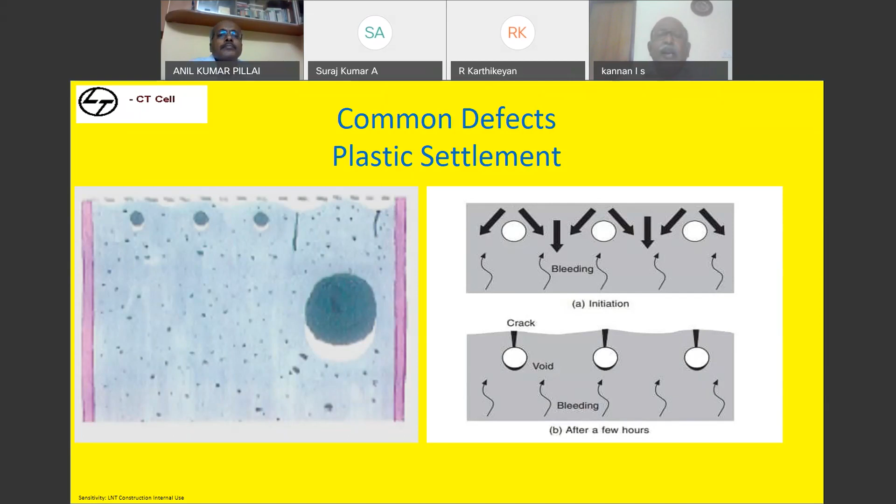In such cases, once you see that, place some concrete in that location and revibrate it. That's all, simple. When you revibrate it, you are able to close everything. So these two are the fundamental cracks that generally happen, plastic settlement and plastic shrinkage, in handling concrete in the green state. Revibration is the major remedy.

Other than that, there are various other types of cracks, like early thermal contraction. Suppose I am using high strength concrete in a column. High strength concrete normally has a very high heat of hydration. If you remove the column side shutter before 24 hours, it's okay, because heat dissipation can happen, so the concrete doesn't suffer much thermal shock.

Don't keep the shutter for 3 or 4 days. When you remove it after that, the internal temperature may be around 65 to 70 degrees while the ambient temperature may be 30. There will be a sudden release of 30 to 35 degrees temperature from the concrete to the external ambient, which makes the surface crack. This thermal shock normally happens in thicker wall sections and where high strength concrete of M50 and above is used, especially in circular columns or larger columns.

Crazing cracks are nothing but spider net cracks. Normally, suppose in a plaster surface, if you pour water after a week or 10 days, you are able to see a lot of octagonal cracks. Similar cracks are called crazing.

These cracks can happen normally in case of a slab or foundation where excess compaction has happened and excess slurry accumulation can happen on the top. You can see some white patches on the top, then the white patches will slowly break, like how clay breaks when it dries. It's all crazing cracks.

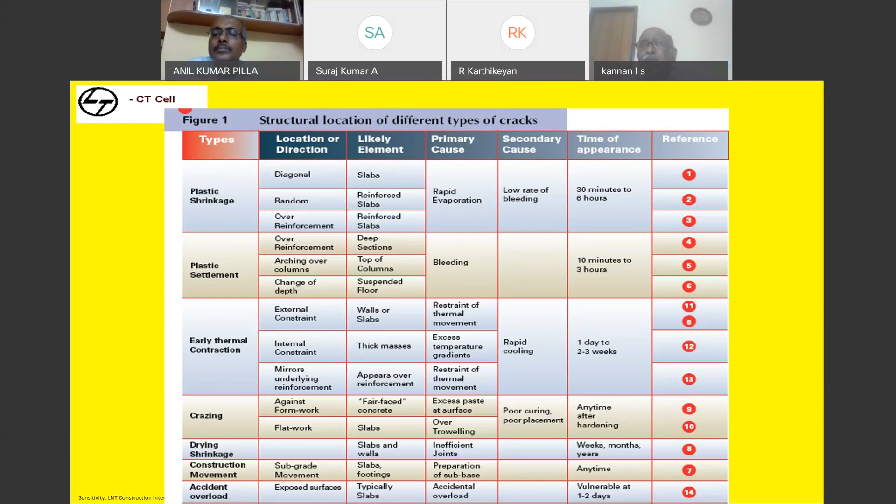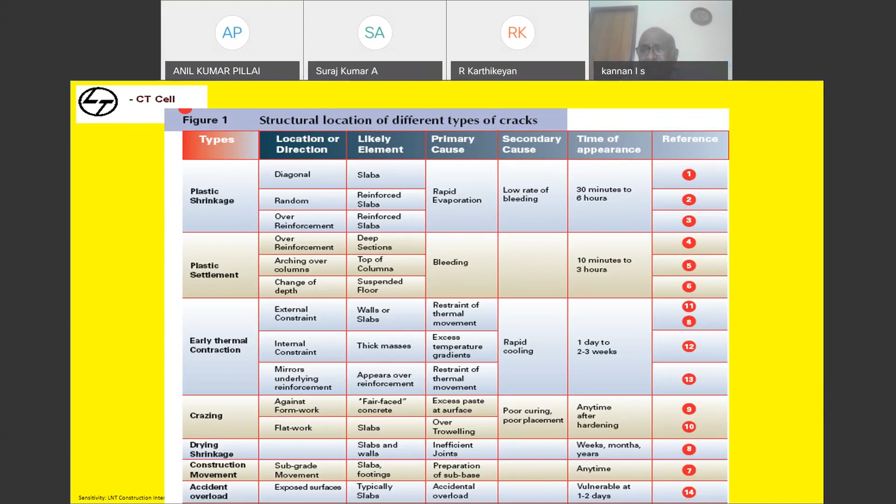Then construction movement - suppose if you are doing a subgrade where the subgrade is not filled proper or the compaction of the soil has not happened proper, the foundation former can move, the concrete can settle and crack. That is construction movement. Whenever the flooring has been done, by mistake for a subsequent activity some equipment has been moved on top, which locally crushes the concrete. This is the indication of various cracks.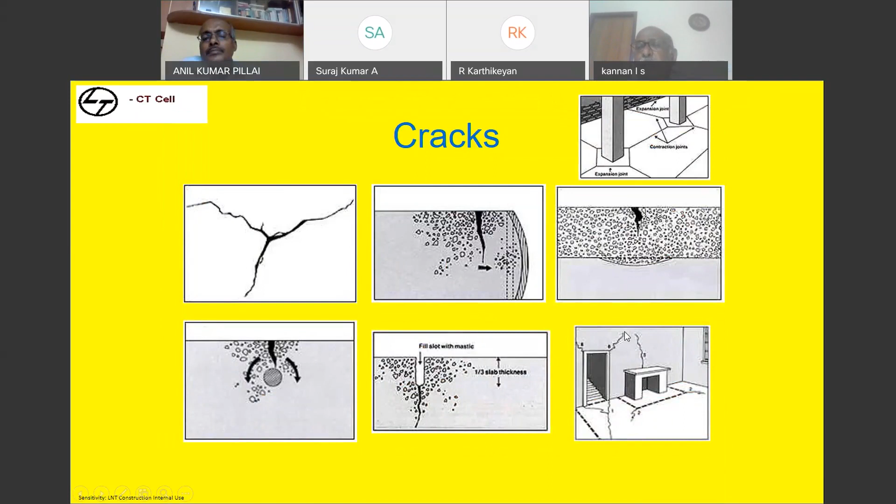These are all thermal cracks, so you are able to see. Whenever you see a crack on the slab, don't simply jump to the conclusion that it happened only due to shrinkage. You can get an initial idea by seeing the pattern, but every crack is not a shrinkage crack. It needs to be analyzed by an expert who can understand the concrete phenomena.

Then accordingly, the rectification methods need to be derived, because the rectification method is not common for all types of cracks. Depending upon the cracking phenomena, the tendency, the loading structure and loads applicable in the structure, the rectification methodology needs to be given, and the rectification process can happen. But cracks are not harmful in concrete except unless it is structural.

So don't jump to conclusions, especially if you take care of the concrete well in the green state, and if you take care of plastic shrinkage and plastic settlement, 99.99% of the issues in structures are resolved. Because the majority of the issue happens only after deshuttering - we say cracks are there, it has started leaking and all.

So kill the crack - allow the concrete to crack in the green state, and kill it with the secondary finish. Normally for doing this, you have to put a separate mason, don't put the same mason to go and finish, because by the time you tell him to finish and go, when you leave, that fellow will also move out. Put a separate mason, put a separate supervisor, ask him to finish and start curing.

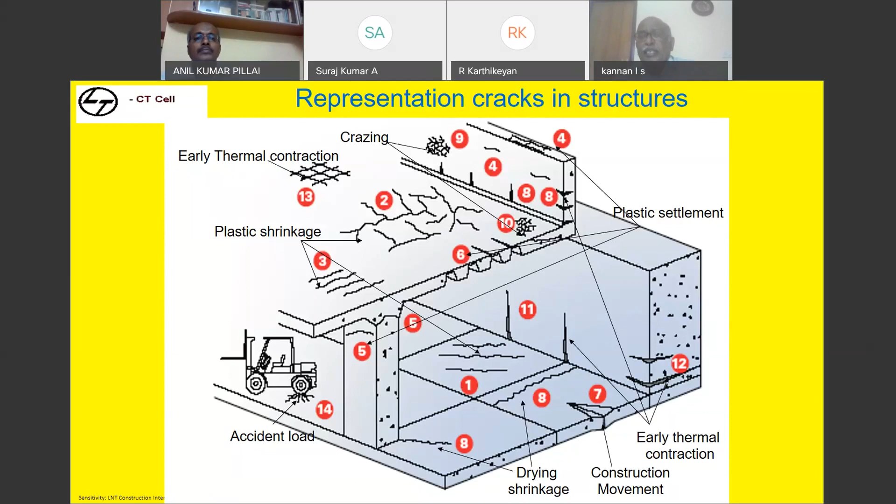And if you are able to protect it, the structure will be safe. Thank you for your patient listening.

I think that was a wonderful presentation, sir. You had covered the practical aspects on how to avoid cracks and how to do volume to weight batching, and a very important point about the minimum grade of concrete that should be used, which should be M20 for RCC works, normally not followed especially in small sites. I think the practical implication of how to do compaction, leveling, and finishing was really an eye-opener. You had covered the practical aspects. Now, shall we take a few questions?

One of the questions being asked is that for concrete we are using so many different materials - cement, aggregates, admixtures. A lot of types of cement are there. Even Ramco Cement is manufacturing 12 different types of cement for different applications. Now the thing is...

Are you able to hear? I think there is a problem.

So the thing is, I wanted to ask him whether ordinary Portland cement is better, or Portland Pozzolana cement or blended cements are better for concrete. I'm sure that in terms of what he has covered now - heat of hydration, occurrence of cracks and things like that - one should go in for a cementitious material or blended cement. So that was the clarification wanted, and he has covered all the practical aspects.